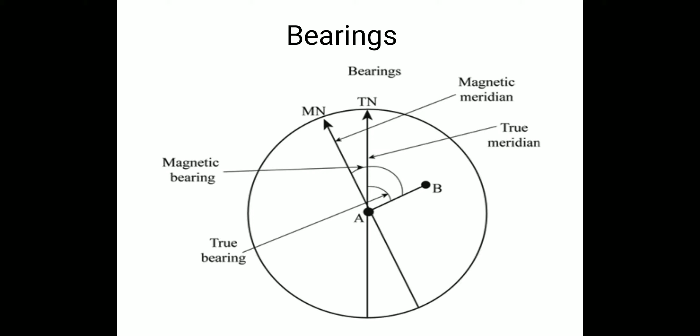So, the difference between the magnetic north and the station point is the magnetic bearing, and the difference between the true north and the station point is called the true bearing. The line indicating the magnetic north is the magnetic meridian, and the line indicating the true north is the true meridian.

So here we have two kinds of bearings. One is whole circle bearing and another one is reduced bearing. In whole circle bearing, all the bearings that are taken are with respect to north. In reduced bearings, the bearings may be taken either from the north or from the south. In case of whole circle bearings, it will be 0 to 90, 0 to 180, 0 to 270 and 0 to 360, always from the north. All directions will be from the north.

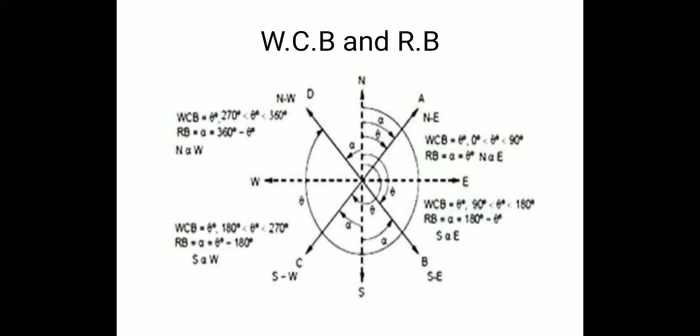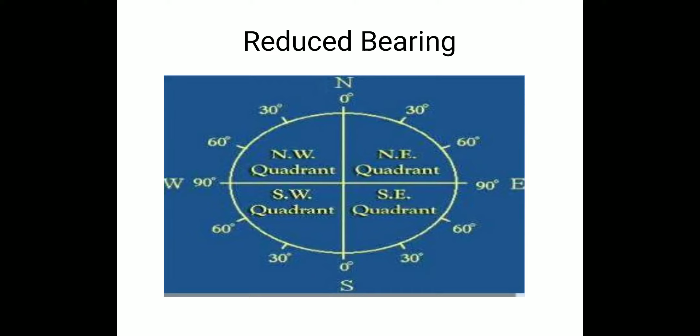In case of reduced bearings, it will be either from the north side or from the south side: either from the northeast or from the southeast, either from the northwest or from the southwest. Here the picture shows the whole circle bearing from 0 to 360. Here we could see the reduced bearing either from the north direction or from the south direction, that is the northeast quadrant, southeast quadrant, northwest quadrant and southwest quadrant.

So what are the bearing types? First one is fore bearing and next is back bearing. Fore bearing is the bearing taken in the forward direction from a station point towards another station point. Back bearing is taken from the next point to the previous point in the backward direction. Fore bearing is forward and back bearing is backward. That is the difference, indicated in figure A for fore bearing and figure B for back bearing.

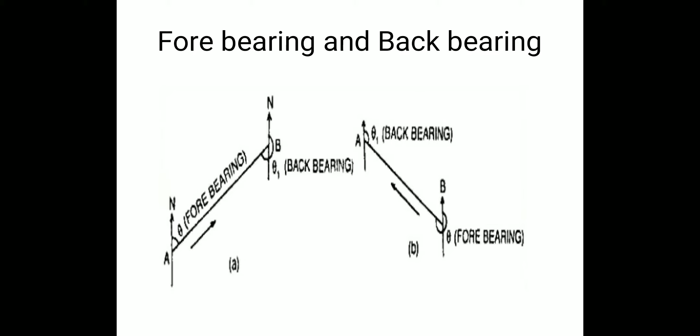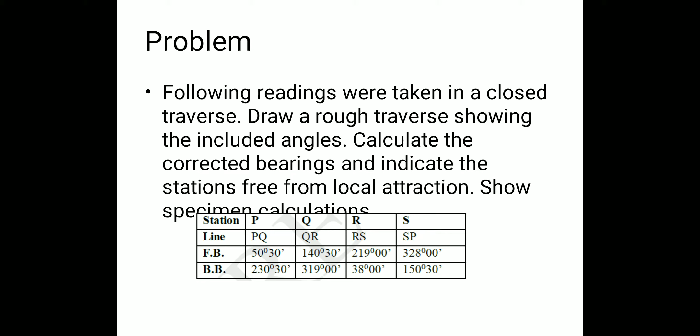So now we will see a problem on how to calculate the bearings. Following are readings taken in a closed traverse. Draw a rough traverse showing the included angles, calculate the corrected bearings, and indicate the station free from local attraction. We have station points, lines, fore bearing, and back bearing.

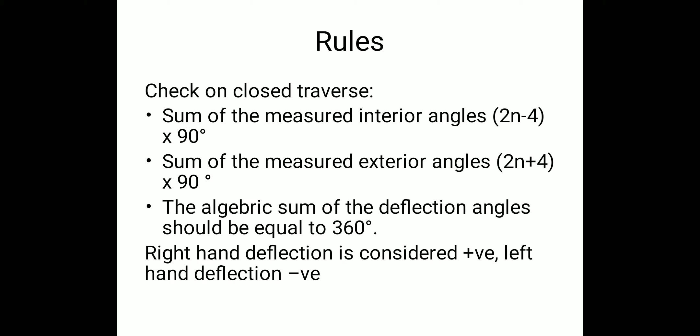The major rules involved in checking closed traverses: the sum of the measured interior angles should be (2n minus 4) into 90. The sum of the measured exterior angles should be (2n plus 4) into 90. The algebraic sum of the deflection angles should be equal to 360. Right hand deflection is considered positive and left hand deflection is considered negative.

So in the problem, following are the bearings taken, the fore bearing and the back bearing. Compute the interior angles and correct them for the observational errors. This is the second problem. The first problem you can solve as an assignment. I'll be explaining the second problem.

Similarly, BC will be 223 degrees 15 minutes and 44 degrees 15 minutes. Each bearing of a line is referenced from the north direction in a whole circle bearing, and from either north or south in a reduced bearing. CD is 287 degrees 0 minutes and 107 degrees 45 minutes. DE is 12 degrees 45 minutes and 193 degrees 15 minutes. EA is 60 degrees 0 minutes and 239 degrees 0 minutes.

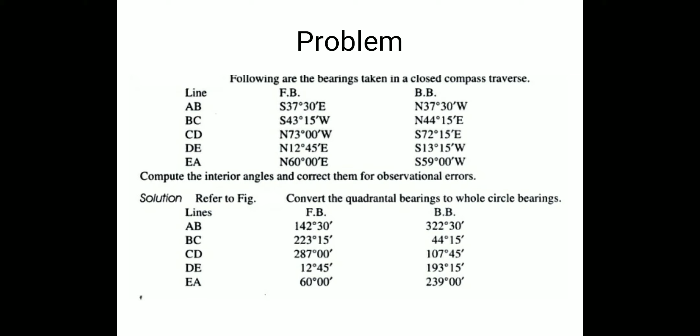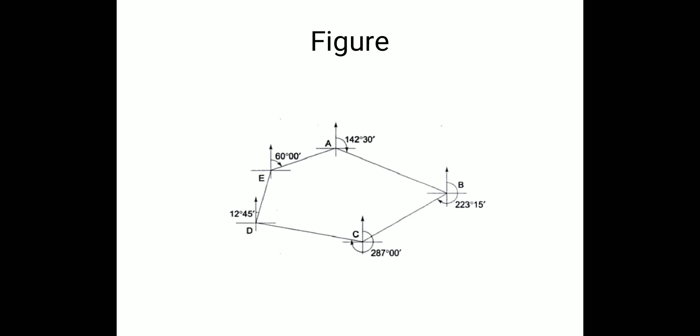Hope you all have learned what bearings are and how bearings are calculated. Kindly solve the problem that is given.